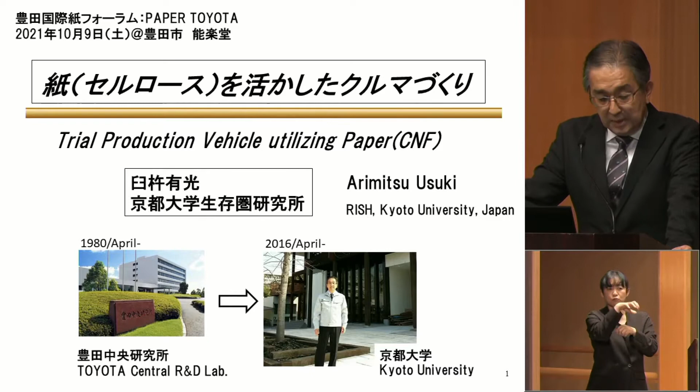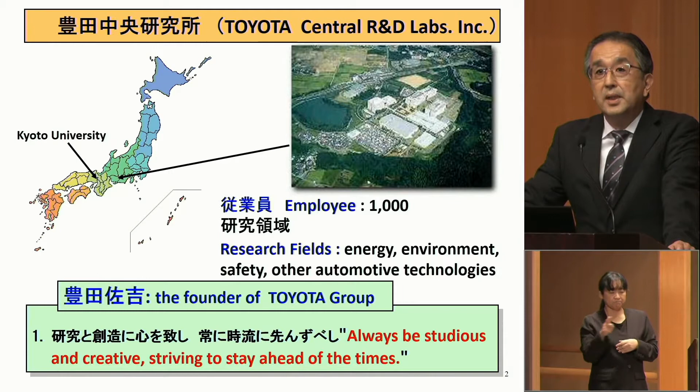Before starting my presentation, I will introduce Toyota Central R&D Laboratories. It is located here in Aichi Prefecture of Central Japan, in the city of Nagakute. Always be studious and creative, striving to stay ahead of the times - this statement was made by Sakichi Toyoda, the founder of the Toyota Group. That is the basic policy of Toyota R&D Laboratories, which is working on energy, safety, and other issues for automobiles of the future.

By the way, have you ever heard of the 5 main principles of Toyota, or Toyota Koryo? Toyota has these 5 precepts, so even in English we call it Toyota Koryo. Today time is limited, so I will just show you this, but the second one is the most important for me: always be studious and creative, striving to stay ahead of the times.

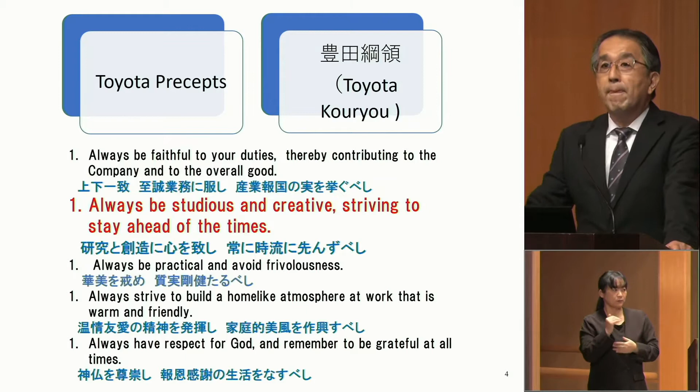When I joined Toyota Central R&D Laboratories, my first job was as described in this paper. I'm going to use technical terms in the following few pages - this is polymer nanocomposite. We polymerized nylon 6 in clay galleries. The paper was published in 1993, and it was said to be the world's first polymer nanocomposite. I am deeply attached to this material.

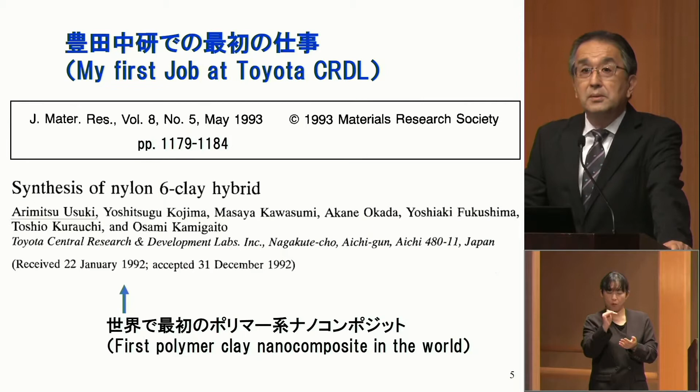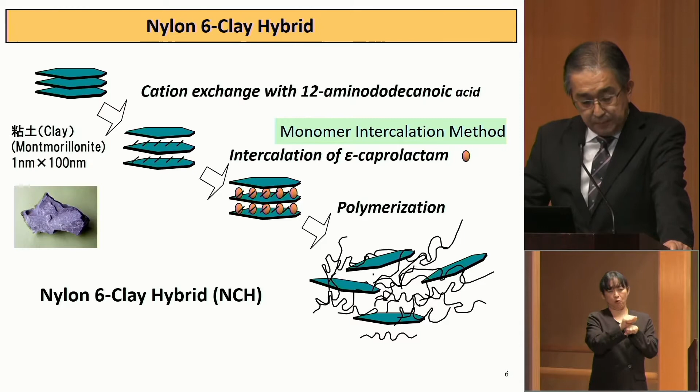This slide shows the scheme of how the nylon 6 is synthesized. Starting from upper left, clay has layers. The nylon 6 is synthesized between the layers - sorry, again it's very technical - but by cation exchange with 12-amino dodecanoic acid, intercalation of a monomer, epsilon caprolactam, and polymerization, the clay is dispersed in the polymer at the nanometer level. This scheme is very simple, but a good material can be generated. That's what we obtained back then. We named this nylon clay hybrid, or NCH.

NCH has high tensile strength, tensile modulus, and heat distortion temperature, which is a critical factor for vehicles. Just by adding 4.2% of natural clay, compared with pure nylon 6 at the bottom, tensile strength increases by 1.5 times, tensile modulus by 2 times, and heat distortion temperature by 90 degrees. The amount of added inorganic ingredient is very little, so the material is light, strong, and heat resistant. We produce such a material.

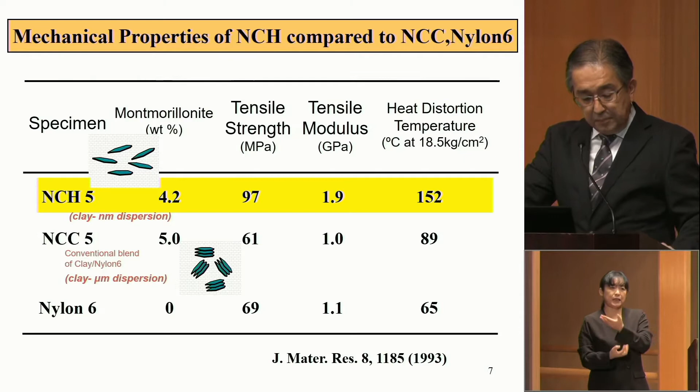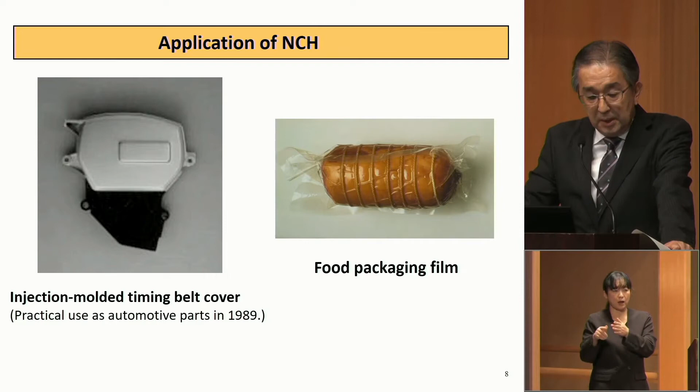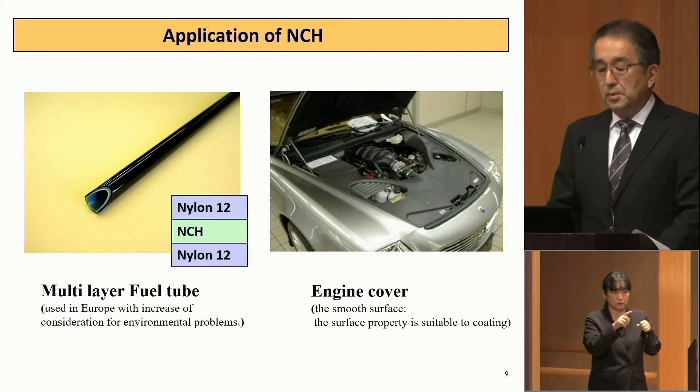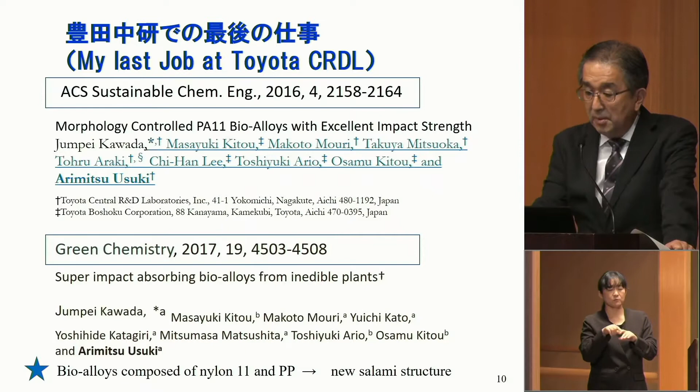Now let me touch upon my last job - actually there are these 2 papers on the creation of bio-derived nylon 11 and also polypropylene PP alloys, which is also used for vehicles such as bumpers. So we mix them into an alloy, which becomes a very good material again. We published papers in 2016 and 2017. The nylon 11 was dispersed like islands in polypropylene, and a new salami structure was found. These were summarized in these 2 papers.

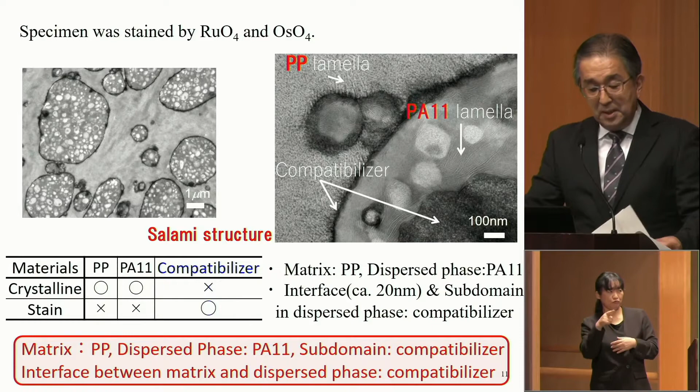This shows the high-order structure of the polypropylene PA11 alloy. The matrix is polypropylene, and the islands are nylon 11. The interface is the compatibilizer to promote mixing. This is a new structure called salami structure. The island structure has a lake structure inside, so it has very good features. Let me explain that.

The lower right is the mix of PP and PA11, and impact strength is very low. However, this newly developed salami structure drastically improves the impact strength to 80.

So it is often used for PC ABS, polycarbonate ABS alloy for helmets, which is about 50. So this new material has a higher impact strength.

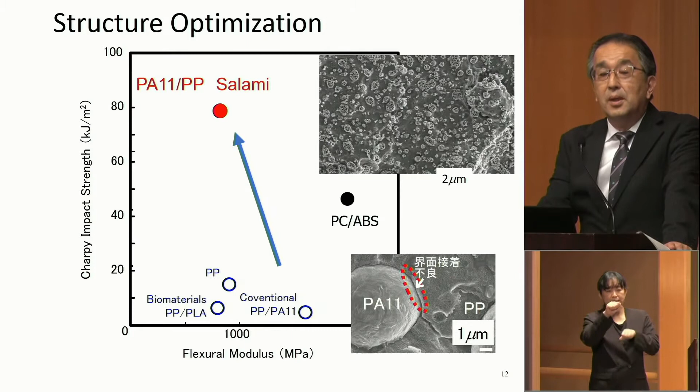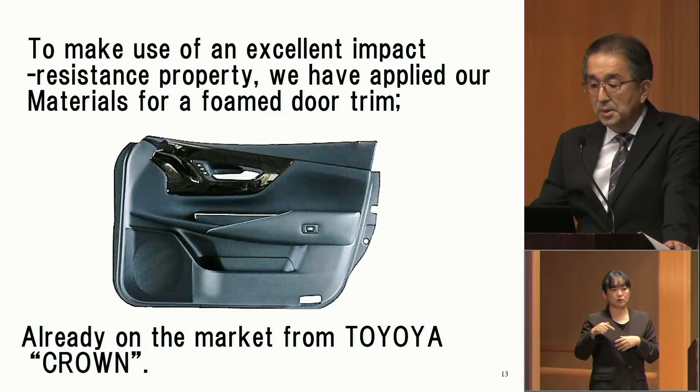We wanted to make use of this good material for automobiles, and this excellent impact resistance property was utilized and applied for the Crown model of Toyota, Crown door trim.

So far, the introduction of my career at the Toyota Central R&D Laboratories. Since 2016, I was in the Central Lab, but I also received an offer to work for Kyoto University. For 3 years, I have been commuting between the 2 locations for work.

At Kyoto University, the first and probably the last job was, as I said before, the nanocellulose vehicle project of the Ministry of Environment, and I became the project leader. Paper is broken down to pieces, and cellulose nanofiber is made, like fiber of wood materials broken down, and that is applied for materials of automobiles. That will be my last project in my career.

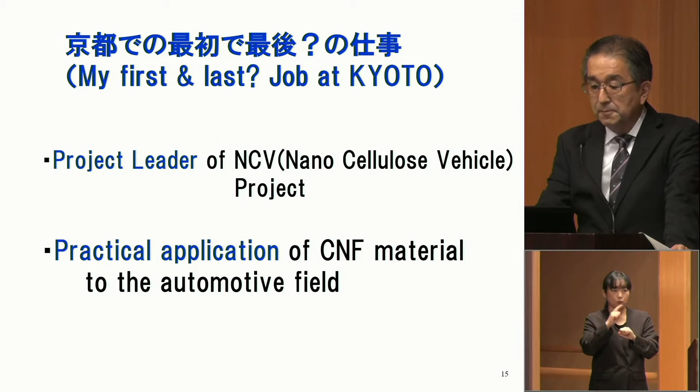In other words, making cars out of wood is my job. You might be surprised to hear that.

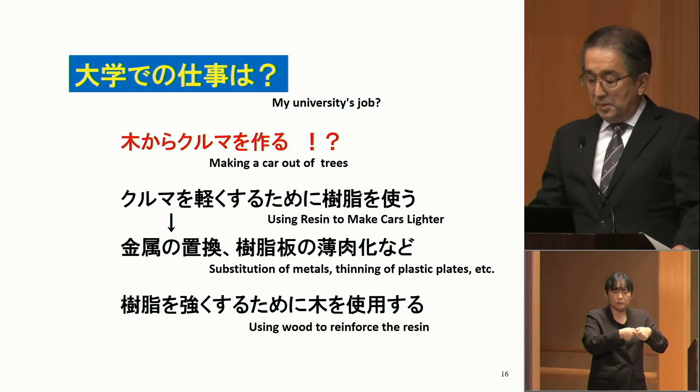So wood means paper or cellulose. It's broken down into pieces and then used to reinforce resin. Well, we don't use wood as it is. When the wood is made smaller and smaller, there is a fiber-like form.

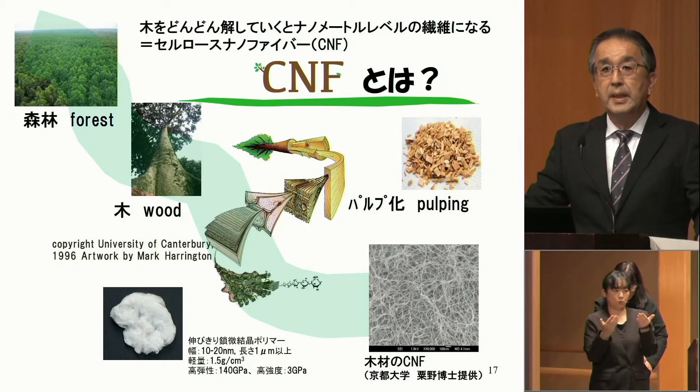Also, it's highly elastic and very strong. The modulus is 140 gigapascal. If you look at this figure, it's actually 5 times stronger than iron. So such fiber is incorporated into plastic to reinforce its quality.

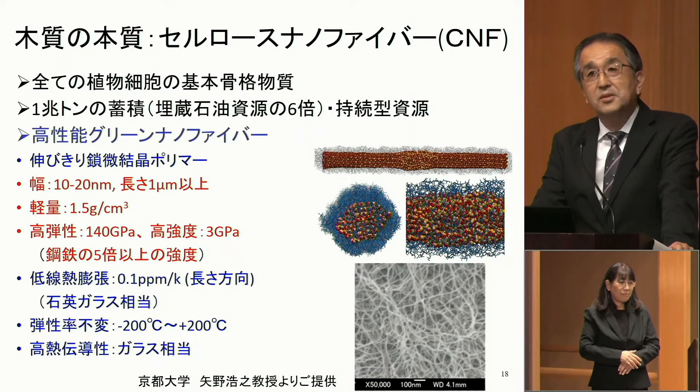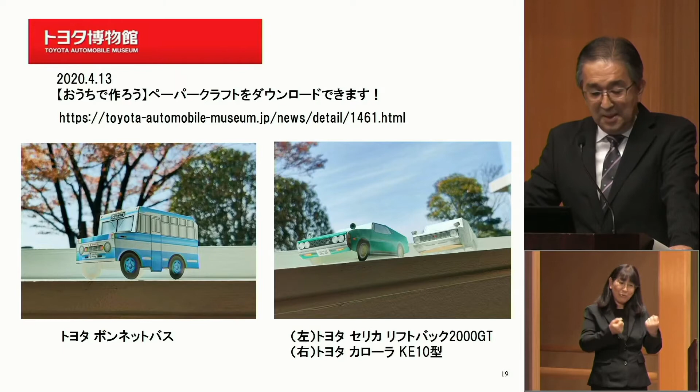First, about making cars from wood - people might misunderstand this as origami, folding paper, or paper craft. Traditional paper craft in Japan is very popular, and this is from the Toyota Museum website, a paper craft example. If you look at this, a bus and passenger cars can be made using this paper craft material.

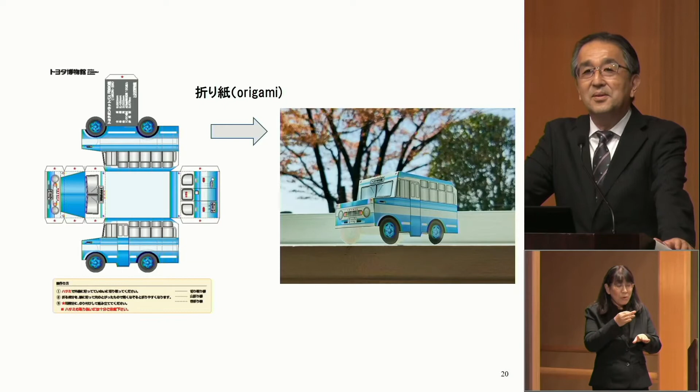The bus is made using this deployment diagram, and if you fold as instructed, you can make a bus. That's a very interesting part of paper. But it is really difficult to actually use paper in a real car. However, a couple of years ago, Toyota made this prototype.

That is an origami car made of cardboard. Every material is from cardboard, and it can actually run. The Lexus logo is in the front. I would like to try driving this vehicle. So this is one example.

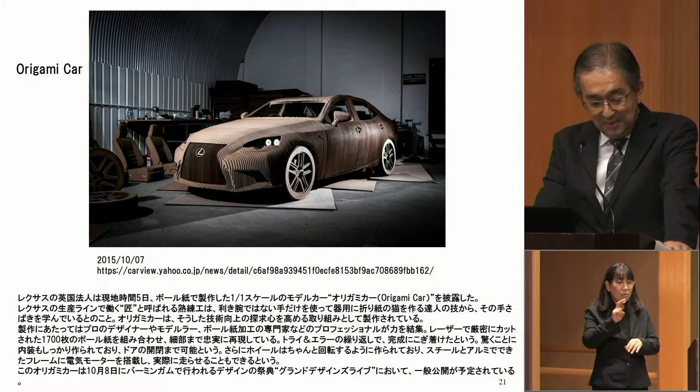But unlike this, the resin has cellulose or paper ingredients to reinforce it. And from here, this is a story of my work at Kyoto University.

The Ministry of Environment Nanocellulose Vehicle, NCV project. In this project, vehicle lightweighting is the perspective, and we generate CNF materials and do the evaluation of a car. That is the main objective. And in this trend, we would do the synthesis of materials and also produce parts, materials, and then vehicles.

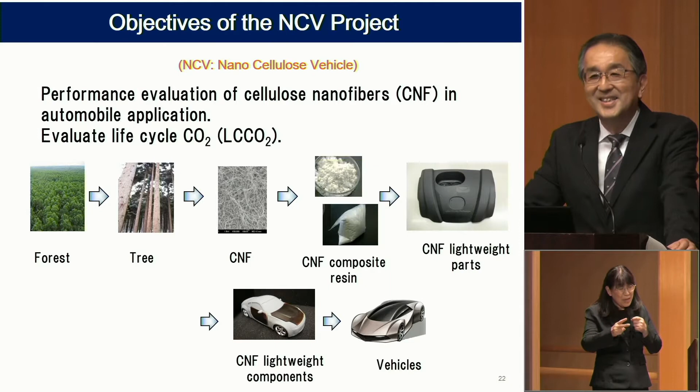In 2016, I joined this project, and we wanted to complete it in 4 years. I thought it was interesting, so I joined. But 4 years, while it seems long, is actually not very long, and I was very busy.

So what is the cellulose nanofiber benefit in the automobile industry or field? Again, vehicles can be made lightweight using this, and carbon dioxide emissions, which is a big problem now, can be reduced. Also, we can ensure security of supply - Japan has forests, so cellulose is abundant.

So, thirdly, we can reduce the use of plastics. And this is also government policy of Japan.

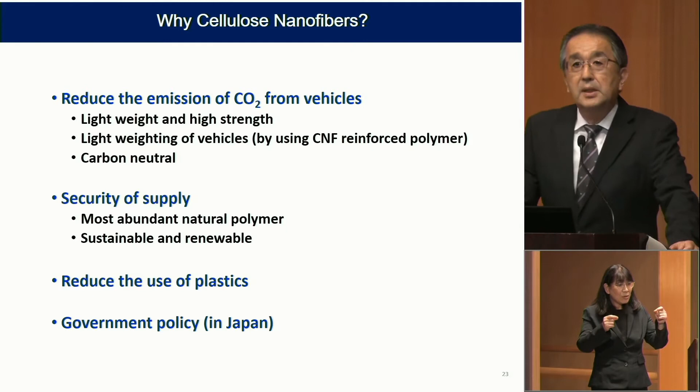When I was in Toyota Central R&D lab, I didn't know much about the ministries, but I moved to Kyoto University and then interacted with the ministries. And for the CNF, ministries were collaborating with each other.

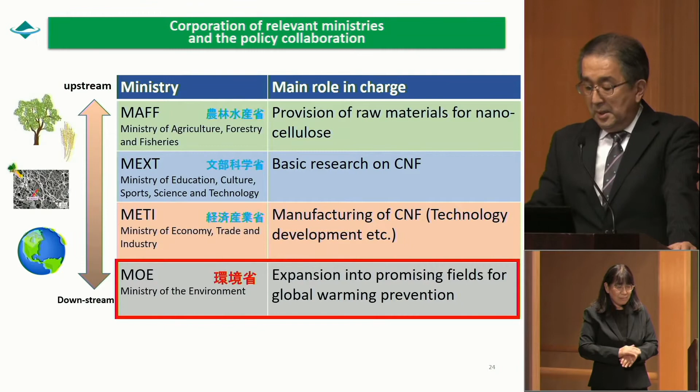I belong to the project of the Ministry of Environment, which is sponsoring the NCV project. This ministry's role is on the downstream side, from upstream being MAFF, MEXT, and METI, to MOE, and then we would actually use it for automobiles. I believe this project enables expansion into promising fields for global warming prevention.

So I went to Kyoto University in 2016, and I needed to collect the members. That was the hardest part, but I asked many people, and actually we gathered 22.

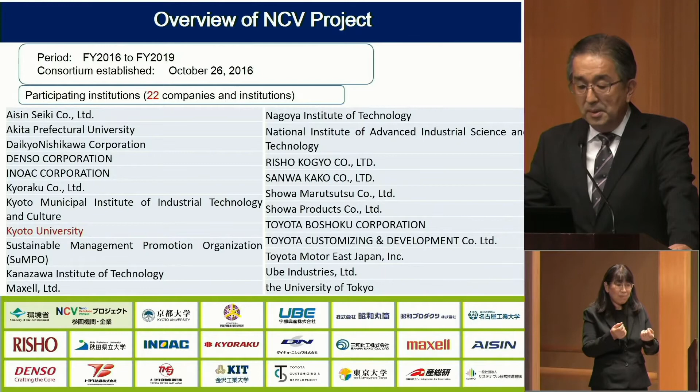We are sharing the roles and divisions in our activities, and Kyoto University takes an initiative for overall activities. So I invited them, and that's why there are so many Toyota Group companies in this project. But thanks to that, we can collaborate very closely to generate a new vehicle.

This is the organization chart of the NCV project. I myself am the project leader, and the sub-project leaders are Professor Yano from Kyoto University, and also Professor Kageyama from Kanazawa Institute of Technology. There are 7 groups under that.

Yes, as you can see, there are 7 groups in total. Some of them are full-time workers, but including others as well, in total we have more than 500 people here.

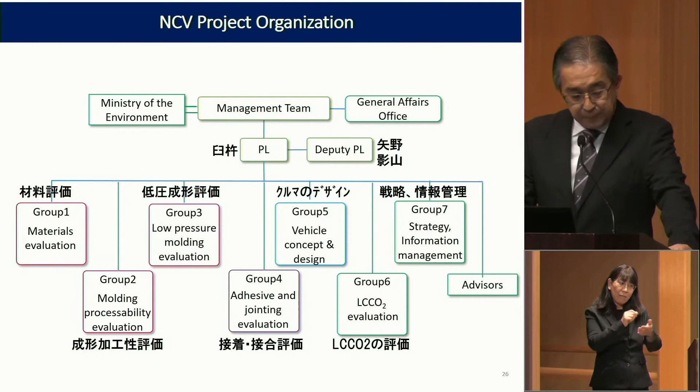Actually, I was concerned whether we could really do that in just 4 years, but in 2 years, in fiscal 2017, the first prototype was realized. So actually 2 parts of the existing vehicle were replaced with the prototypes, and after that we created the final prototype for the Tokyo Motor Show.

For the first prototype, we selected the Toyota 86, and the engine hood and trunk lid were replaced with CNF parts.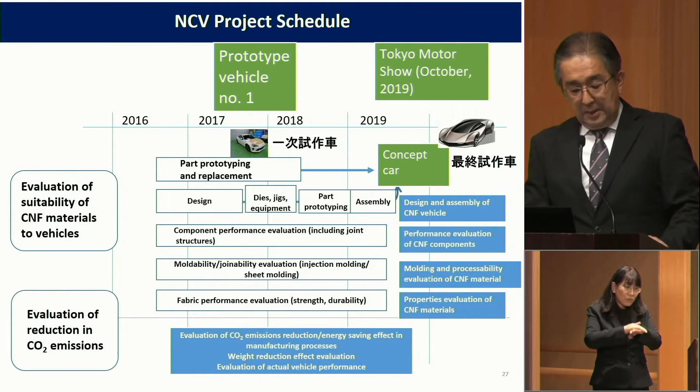Here are the materials used. For CNF: chemically modified cellulose fiber, and unmodified cellulose nanofiber. Paper including CNF was also used. For polymer, polyamide, polypropylene, and polyethylene - a variety of polymers were used.

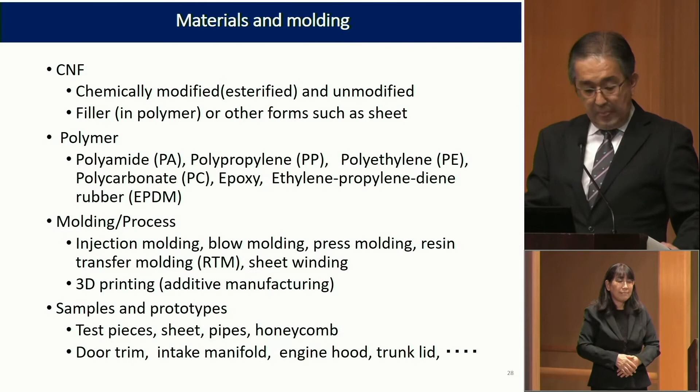Now let me talk about specific cases. This is the polypropylene CNF composite door trim - a prototype of a door trim. Adding 10% of CNF to polypropylene increases the modulus by 1.6 times. As a result, the board thickness was changed from 2.3 millimeters to 1.9 millimeters, and the total weight was reduced about 10%.

This door trim was manufactured by Toyota Boshoku, and was installed on the final prototype car.

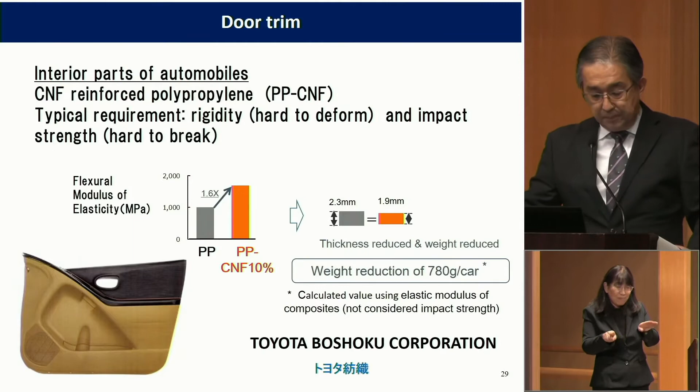This is a prototype intake manifold made of polyamide 6 CNF composite. The current product contains 30% glass fiber, but adding 15% CNF to PA6 increases the modulus about 2 times, so it's almost the same as glass fiber. The specific gravity is smaller than glass fiber, so the total weight was reduced about 13%.

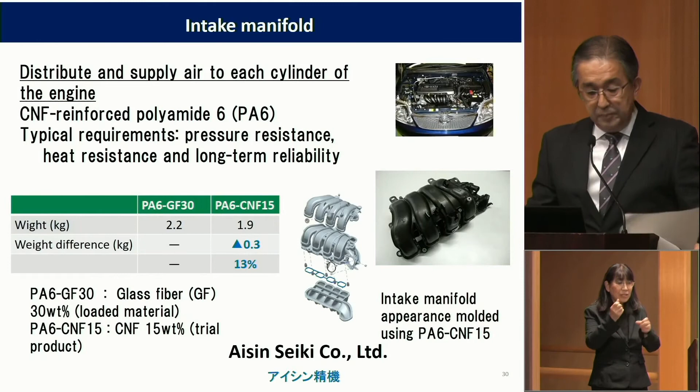This was made by injection molding. So here are other examples.

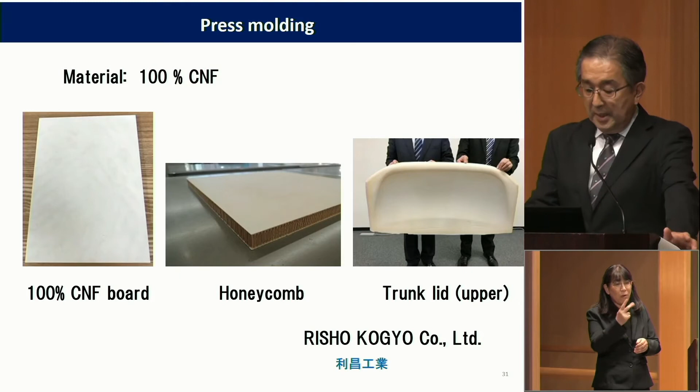This is a 100% CNF material produced by Risho Kogyo. CNF is often sold as water-dispersed material, and this aqueous dispersion is hardened by filter pressing into a sandwich structure with a honeycomb inside. The bonnet or engine hood was made using this material, which is 100% cellulose.

This is a paper pipe wrapped with a CNF sheet produced by Showa Marutsutsu - Marutsutsu means a round tube. This tube is very fragile, so this material was used for reinforcement, and again the weight has been reduced by half.

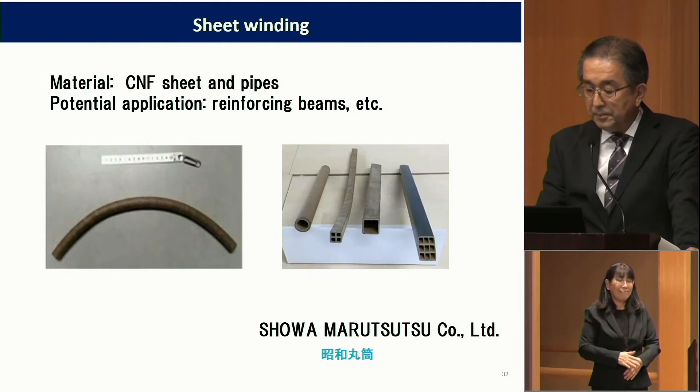This is a polypropylene CNF composite hollow part manufactured with blow molding - blow molding is the method used for PET bottles. So it's a hollow part and very light. This prototype was made by Kyoraku, and this is the floor of the trunk.

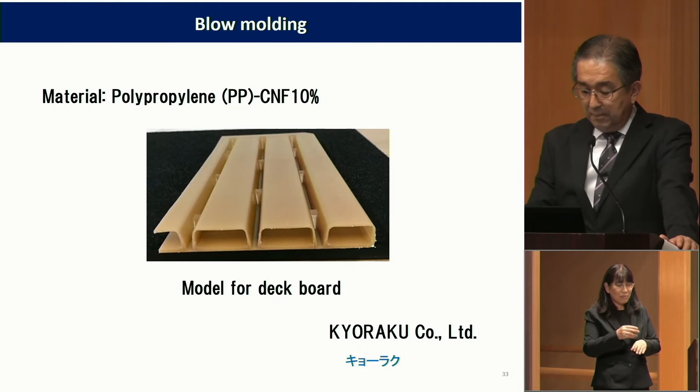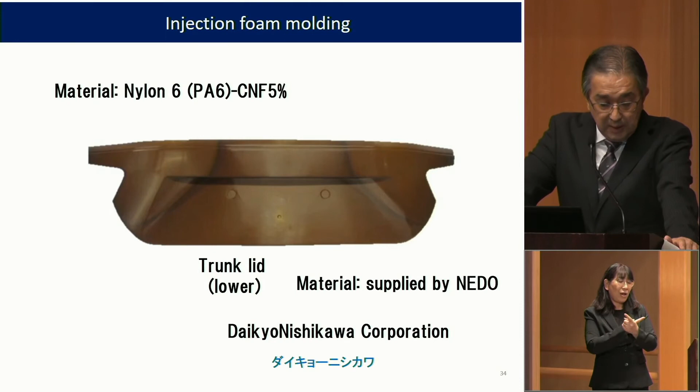This sample was prepared as a replacement for the trunk lid of the existing Toyota 86 automobile, made by Daikyo Nishikawa, which is very good at this kind of part, in Hiroshima. Originally this was made of metal, but this one's weight is only half of the metal version.

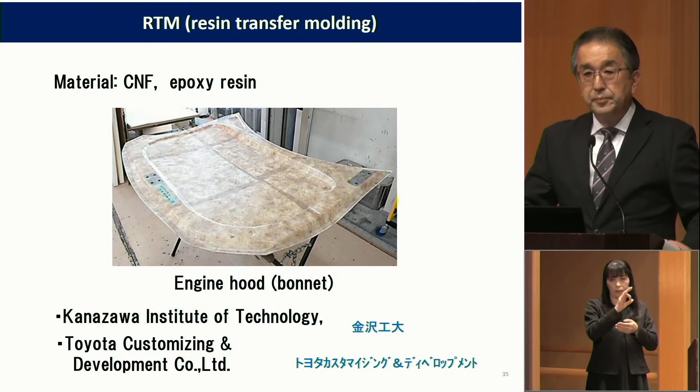This is very interesting again.

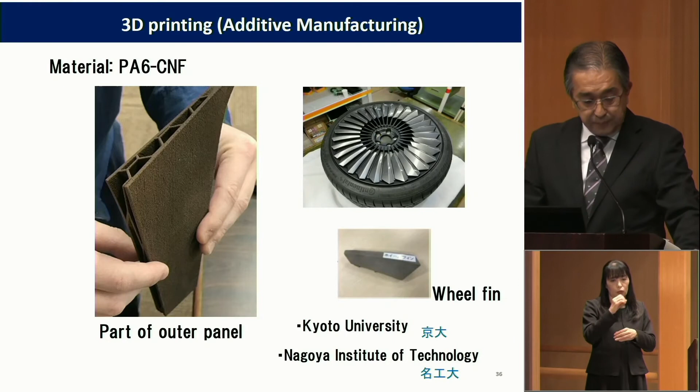For the final prototype car, we had to create unique parts for that vehicle. This is the wheel fin and also the bumper side fin, made by 3D printer by Kyoto University and Nagoya Institute of Technology. 3D printers are very suitable for making grid structure components, and we were able to put it in the final prototype.

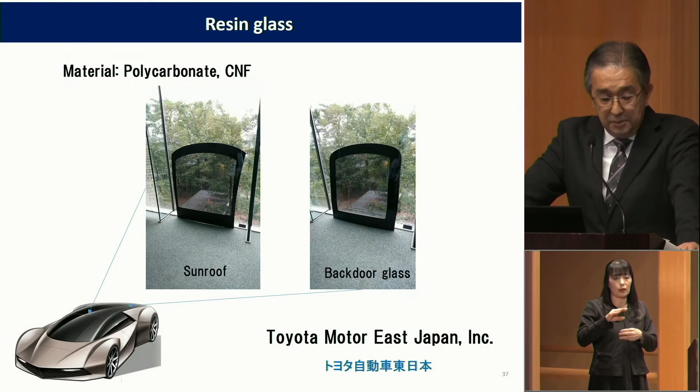This is a huge part, the resin glass, so-called glazing. The left side is sunroof and the right side is backdoor glass. The transparent resin with 15% CNF and polycarbonate were molded by injection press machine. The weight was lighter by 50% than inorganic glass, and compared with resin polycarbonate glass, we were able to reduce the weight by 20%. This was made by Toyota Motor East Japan.

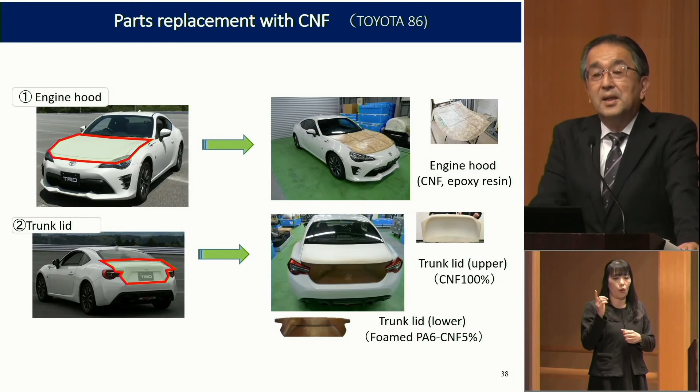This is the first prototype car that replaces the hood or bonnet and trunk lid of Toyota 86 with CNF material. Very first CNF used prototype. Following this success, we made a concept car for the Tokyo Motor Show.

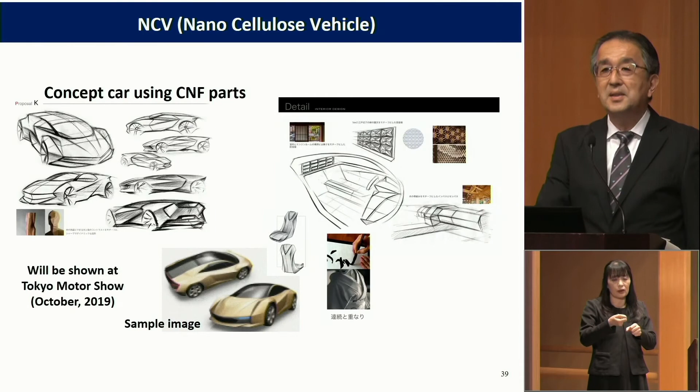We had to do various designs, so we asked the designers to describe the image of wood or the image of Japan. We had various discussions with them, and finally made this prototype. If you look at the picture, the wood carving design is used. This is the overall image of Japanese style. This was shown at the 2019 October to November Tokyo Motor Show.

We had this display at very good timing, I think that we could do this prototype. After this, exhibitions were very difficult to hold due to the COVID-19 pandemic, and the Motor Show scheduled for this year was also cancelled. So in this sense, it was very good timing for us to display this prototype at the Motor Show.

This car uses about 13 parts that we created, and the weight is 1,050 kilograms in total. Usually for this size of car, 1,250 kilograms is the average, so it's 200 kilograms lighter. That means 16% lighter than the average vehicle of similar size, and fuel economy improvement of 11% is achieved.

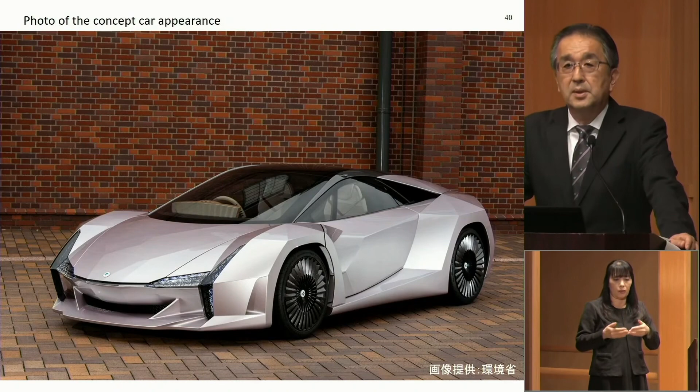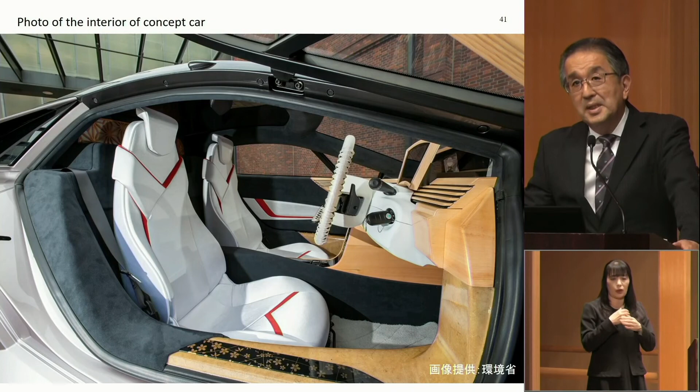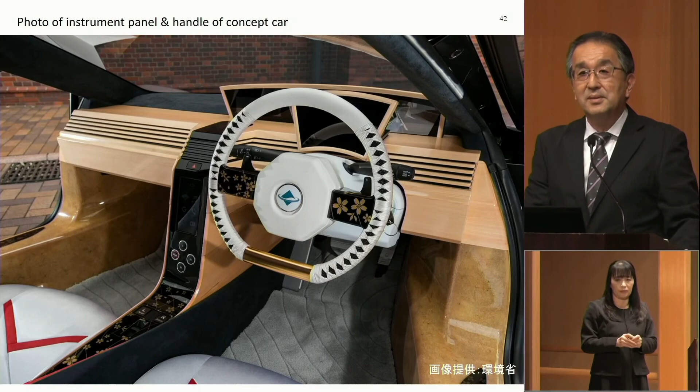This is the interior of this vehicle, inspired by Japanese style. The seats are a kimono design. This is the steering wheel, made with the image of a sword sheath. In the center, the emblem is a logo of the Ministry of the Environment, made with cloisonné or shippo pottery. We have other special touches, but this is not directly related with CNF, so I will not go into too much detail.

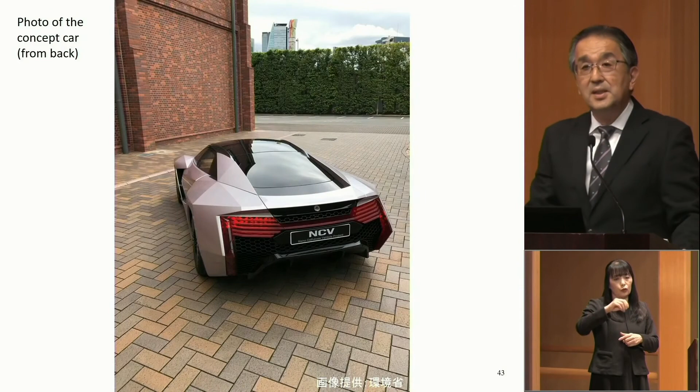This is the picture taken from the back. If you look at this, the headliner, sunroof, and back door are the resin glass with CNF. We exhibited this at the Tokyo Motor Show, and this is a panel from that time, showing the future car made from woods, numbered 1 to 13. 13 parts used the CNF material, and in total this vehicle's weight was reduced to a large extent.

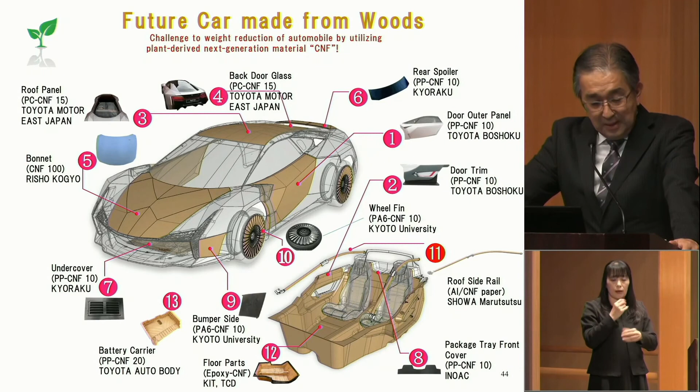When we exhibited this car, it was so beautiful as displayed there, so visitors thought this was just a display item and not actually operable. They asked, can this concept car really run? And actually it can run. I'd like to show you the proof - please look at this promotion video.

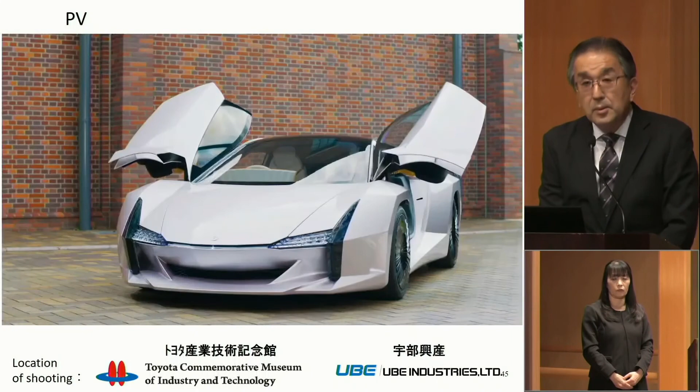This is shot at the Toyota Commemorative Museum of Industry and Technology. And this is the private road for delivering cement of Ube Industries, used for this shooting. Since this is a private road, there's no speed limit.

At that time, Mr. Koizumi was the Minister of the Ministry of Environment, and Akio Toyoda, the President of Toyota Motor Corporation, visited this booth. It was very exciting. Minister Koizumi said it was the first time for him to see a bonnet that can be lifted by hand. It was a very nice comment, and I was so pleased to hear that.